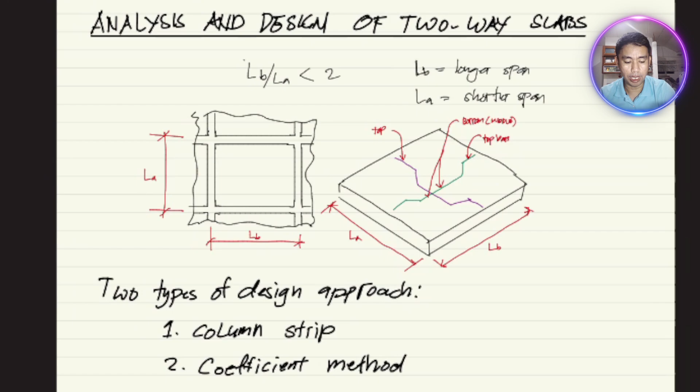First thing, when can we say a slab should be designed as one-way or two-way? We get the ratio of the length of the slab. We have the short span and the longer span, which is LA and LB. So we get the ratio of LB over LA. It should be less than 2. If that ratio is less than 2, the slab is almost square.

Sometimes you will doubt if it's doubly or singly reinforced. If the shape is too rectangular, most probably it's singly reinforced. So let's say the shape is like this, too rectangular. This is our LA, and this is our LB, the longer span. You will see the possible cracking direction is only here, because it's too long.

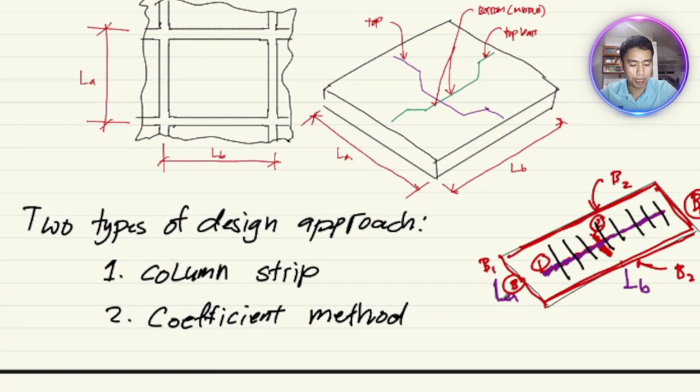Imagine, let's say, we exaggerate it so it really cracks, like that. So in one-way slab, the direction of our reinforcement is only in this direction, like it's stitched. Now, in two-way slab, it's in two directions.

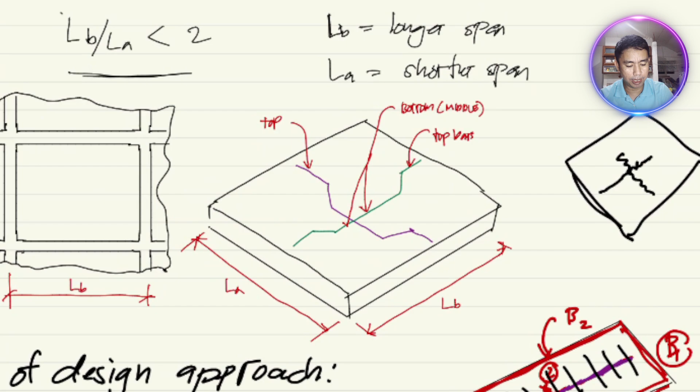This is an example or illustration of the possible reinforcement of a slab. If you see the green, that's the reinforcement along the long direction. Why does it look like a W or U shape? Because here there's a negative moment.

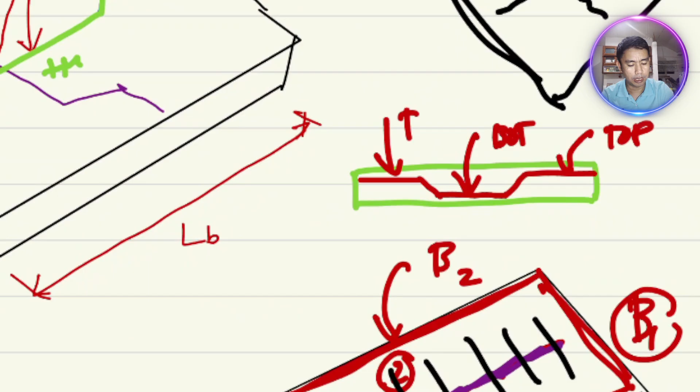Okay, let's proceed to design. There are two approaches in designing a two-way slab — actually there are many approaches, but aside from finite element analysis, these two are the common ones: first the column strip method, and second the coefficient method.

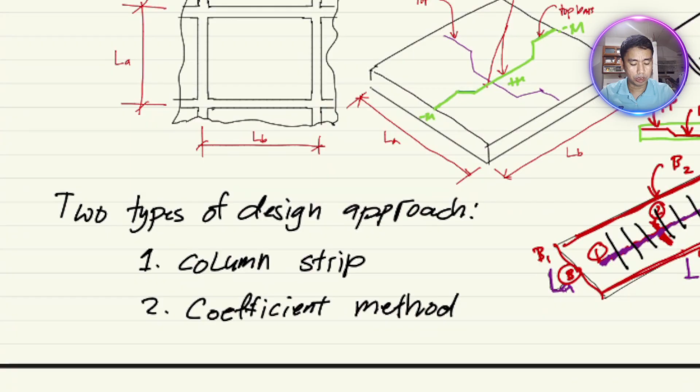What is column strip? Of course there's a column — the slab should have support, whether it has a beam or no beam. In column strip, these are our columns. Let's consider these first two columns. In column strip, we assume a strip — this one marked in red.

Ito yung strip na i-design natin siya na parang beam. As if yan lang yung strip na structural beam natin. Yung sa gitna na strip is parang kinakarga na lang niya. So bawat dalawang column, mayroon silang strip. The same rin dito, supposed to be the same rin sa direction na ito. Meron rin tayong strip, so another analysis naman yan sa direction na yun.

Ma-imagine ninyo, para siyang structure lang na beam column structure lang rin siya. Ang slab, ina-assume natin siya na beam, and then we will design it as a beam. Yung reinforcement, i-apply natin sa strip. Spacing pa rin yung ma-solve natin. Kung ano yung makuha natin na total area ng rebar, then we will use that as main reinforcement and then i-divide lang natin into spacing.

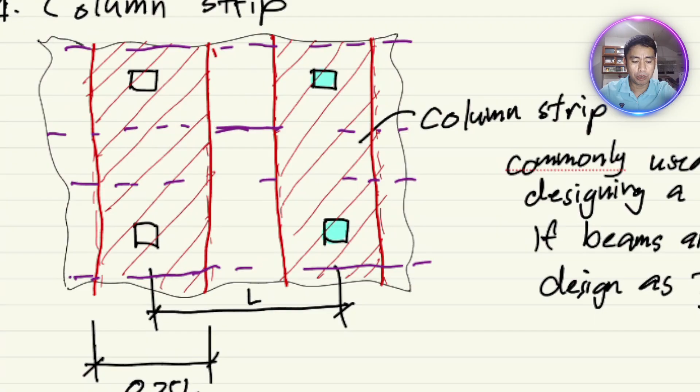Kundi ano lang, pure slab and then supported by column. If you look on the section view, parang ganito ito yung slab natin, then we have our columns. Share lang natin. Parang ganyan. Ito yung columns. This is the slab and then column. So diretso siya, nakapatong lang siya diretso sa column.

Minsan pinakapalan dito sa support para to support for shear. Ang iba precast, gina-deliver na lang sa site. Or ang ginagawa, pag multi-story, mag-cast ka lang sa baba ng whole slab, one whole na slab. And then pag tumigas na yung concrete, iaakyat lang siya. At pagkaakyat doon, nakatayo na yung column.

I don't know if you can imagine. Nakatayo na yung column, and then sa baba na gawin yung slab. May mga butas lang siya from column. And then pag matapos cure, iangat na lang yung slab. And then pagkaangat, if ito yung column, ito yung slab na angat, lagyan na ng lock sa baba. Yun ang one of the precast techniques.

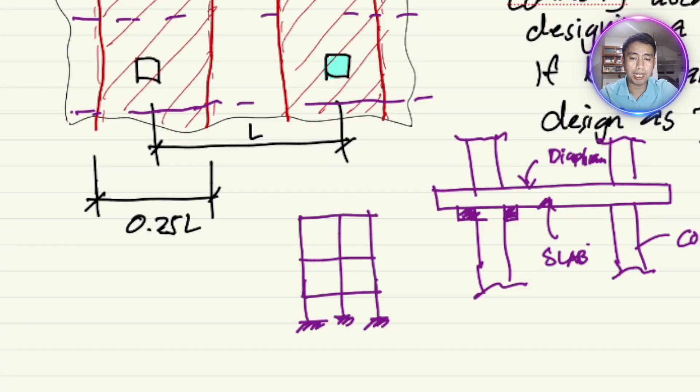Itong column strip generally ginagamit ito sa mga flat slab. Now kung mayroong presence ng beam, kasi tayo dito sa Philippines, prone tayo sa earthquake, most of the time we discourage the use of flat slabs here in our location. Pero kung gusto talaga nating gamitin, may mga structural analysis na mapapastrengthen natin yung concrete. Kung ang problema natin is stiffness, we can add a shear wall. We could add bracings, para ma-stiffen yung lateral stiffness natin. So yan yung column strip analysis.

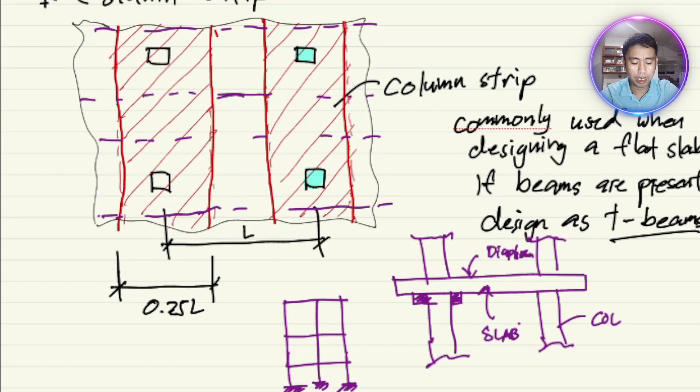Now, we will not include this in our examination kasi this approach sa pag-design ay mahaba masyado at very theoretical. Remember when we design a one-way slab, we use only coefficients, yung omega L squared over 9, over 12, over 14, over 16, ganun. Those are actually estimates para mas madali lang yung analysis natin. Tinry kong pag-aralan ito, pwede niyo namang matutunan, pero kung isasama natin sa exam, medyo lengthy na siya masyado. Minsan just to get the strip, ganun yung property ng strip, yung beam, mahaba na masyado.

Especially kung may beam, kasi T-beam, ang analysis natin T-beam na. Medyo mahaba na siya, and then ang daming mga formula, so I will just skip that one.

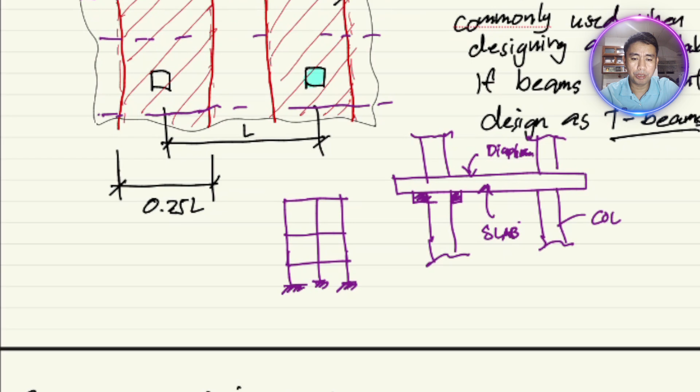I'll just lecture to you, explain to you yung idea ng flat slab at saka column strip, and then kung saan ito ginagamit.

So we'll jump to the second approach, which is the ACI approach. Medyo boring lang siya kasi paulit-ulit, pero this one is the ACI. The con for this one is wala ito sa NSCP. But sa designing, mostly ito yung ginagamit namin. Most of the structural engineers, ito yung ginagamit na approach. So wala lang ito sa NSCP.

Ito nasa book ni Nilson sa Design of Concrete Structures. Pero ito lang yung i-consider natin, i-kasama natin sa exam.

So ano yung itong na concept? This is two-way, still two-way. Dalawang moment diagram ang i-consider natin. So consider tayo ng strip pa rin.

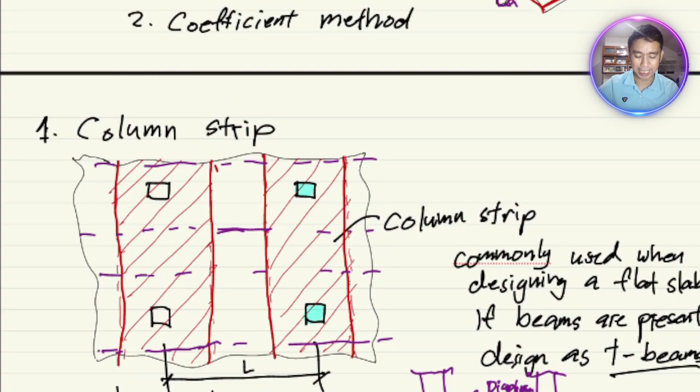Yung kanina is column strip, and iniwasan natin kasi mahirap. Ito, napakasimple lang na strip. Mag-assume lang tayo ng one strip. The same yung approach natin sa one-way design. Assume tayo ng one strip and then apply it all sa succeeding or adjacent strips.

So dito, ganun rin, pero yung strip natin is dalawa. One in the short direction and one is in the long direction. And then each of the strip, mayroon siyang moment diagram.

So we have moment diagram. Most of our moment diagram is, let's say, omega L squared over something, right? Let's say over 9. This 1 over 9 — what is this? I said 1 over 9, but I'm writing 1 over 2.

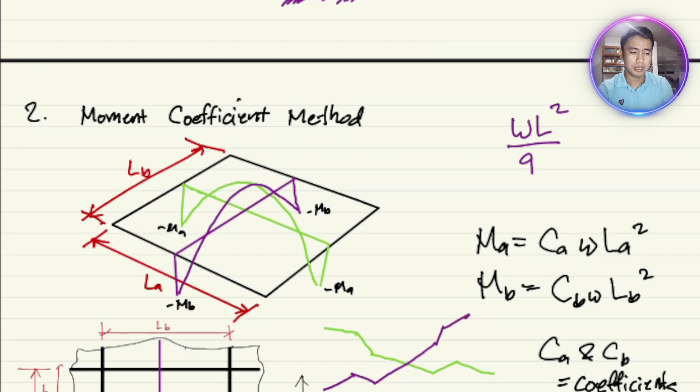Sa board exam, magiging sigurista kayo. Even 1 plus 1, you have to calculate, kasi minsan may iba yung nasa isip mo, iba naman yung sulat mo. Pero you cannot make it as justification sa exam ninyo.

So itong 1 over 9, this is actually an estimate. Hindi talaga yung true na structural analysis where we get the real value of moment. So itong 1 over 9, meron na tayong estimation.

Ganun din ang gagamitin natin dito sa moment coefficient method. Meron tayong pinaka-basic na equation, omega L squared, and then meron tayong CA, where ang CA, these are coefficients. May table na for this one, and we'll just use the table.

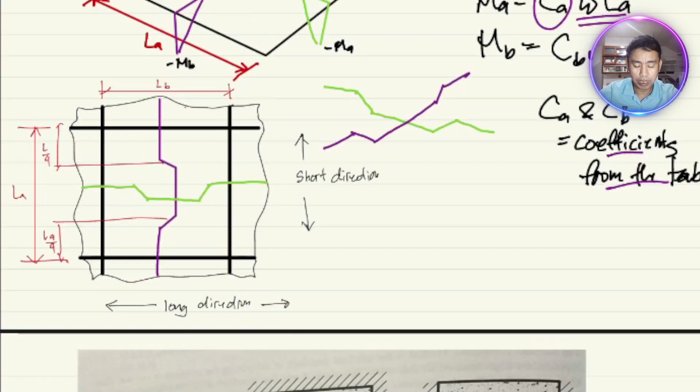And I will teach you here how to use the table. So if you can see here, itong dark black, these are beams. By the way, this approach, ginagamit lang ito sa...

edge-supported slab. Anong ibig sabihin? Edge-supported slab, meaning yung end ng slab mayroong beam. Hindi siya pwede sa open. Dapat mayroon siyang support sa edge. It could be discontinuous, pwede siyang maputol doon yung support, pero mayroon talagang beam. Ganun siya, so ito na ang concept.

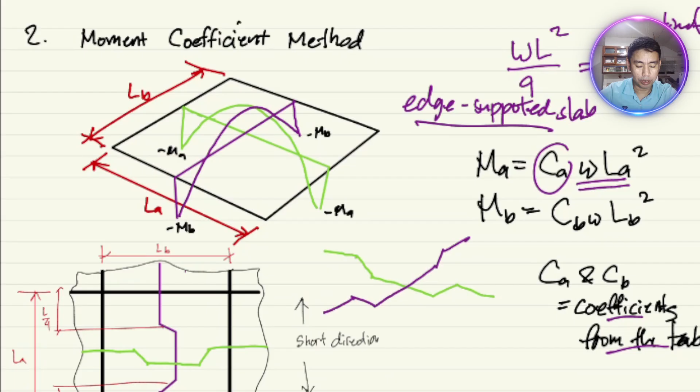Kaya nga widely used ito sa Philippines kasi it's easy na calculation, and then most of our structures here ay mayroong beams talaga. Ang slab is supported by beams. So ganun yung tinatawag na load path.

Load path meaning, meron tayong dead load, live load na naka-apply sa slab. And then from the slab, pupunta yung load dun sa beam. And then from beam, pupunta yung load sa column. Ang column, pupunta yung load dun sa foundation. So ganun yung tinatawag na load path.

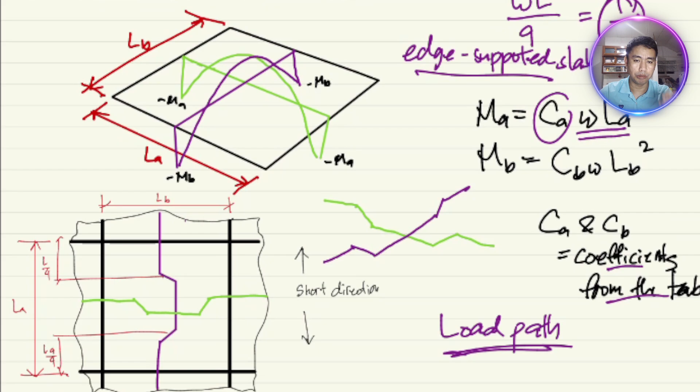So ang reinforcement natin sa two-way span, dalawa. Imagine this dark black, yan yung mga beams natin. At itong mga nasa gilid, that means continuous siya doon, naka-continuous siya, pinutol lang natin sa illustration.

Kung titignan niyo, ang green na reinforcement, yan, sa gitna, that is long direction. We call it long direction, yun yung LB, parallel siya sa length LB. Ang parallel sa LA, we call it short direction. So ang reinforcement ng long direction natin, ito yung nasa green.

Itong naka-purple or violet, yan yung reinforcement along the short direction. So makikita niyo, dalawa, naka-bend lang siya. Bakit parang ganun? Kasi naka-bend siya, kasi along the support, ang reinforcement nasa taas.

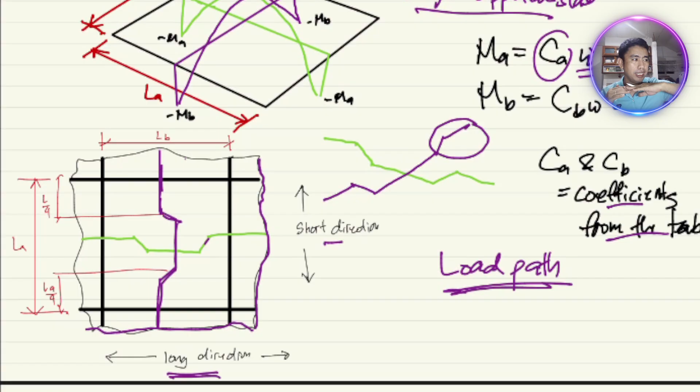So kung mag-reinforce kayo ng slab, hindi pwede yung parang matting lang, nakamating lang siya the same elevation yung reinforcement. Hindi yan pwede na ganyan.

Dapat naka-bend siya, so meaning dapat sa support side, sa support ng slab, yung malapit sa beam, dapat nasa taas yung reinforcement. Sa gitna naman ng slab, dapat nasa baba yung reinforcement. Yung mga panday, pag diretso na, mostly sa mga kita mo sa mga panday na walang experience sa under sa engineering, diretso na lang yan, latag lang diretso reinforcement.

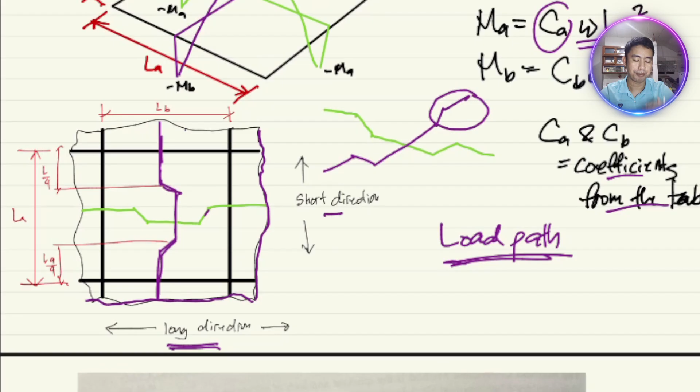You really need wisdom or knowledge from the engineer because there are bendings involved, so we know where our reinforcement is effective.

So, our CA and CB values we get from the table. This is one example of the table. We have a table for total uniform factored load, dead load plus live load, and also separate ones for dead load only and live load only. Then there's the load distribution, how much percentage goes to the short direction beams - I'm speaking about the load path, how much of it will go to the short direction. So this is just one table.

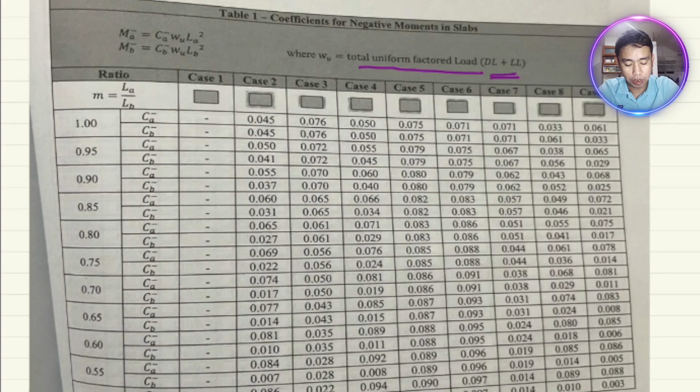In the examination, I will give four tables, and then we'll just look at the table. So in the table, how to use it, we will first determine the value of M.

M is LA over LB. So whatever the ratio is, we use that value of M. Let's say the ratio is 0.95, something like that. Then we'll look at the case.

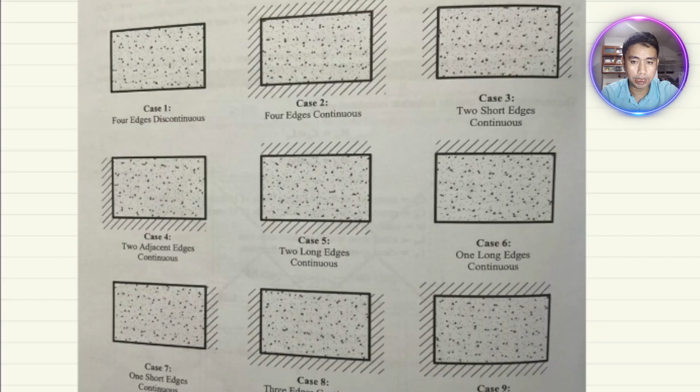What are the cases? We have actually 9 cases. Case 1: looking at case 1, all 4 edges are discontinuous. It doesn't mean there's no beam, because the concept is it should have a beam - it just happened that there's no continuity around it, meaning the slab is cut off there. So if all 4 edges are discontinuous, we call that case 1.

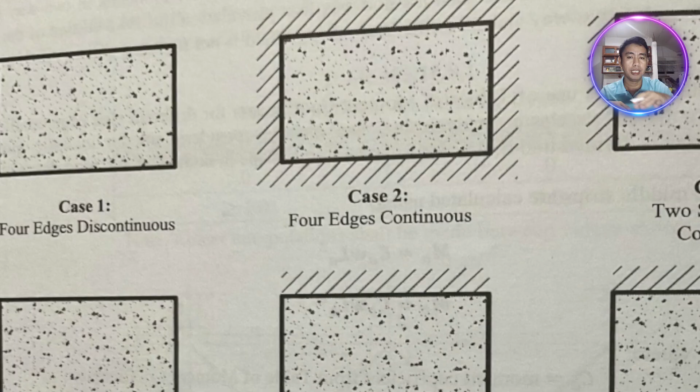Case 2: all slab edges are continuous. These are the interior slabs - we call them interior slabs because they're inside the structure of the building, so other slabs surround it. That's for edge continuous.

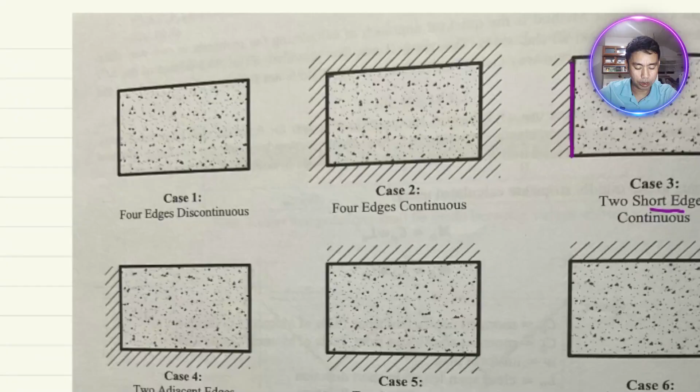So let's say we are on case 3. We have a value here - let's say CA negative. That is short direction and negative moment. This is the factor here, for case 3, the factor is...

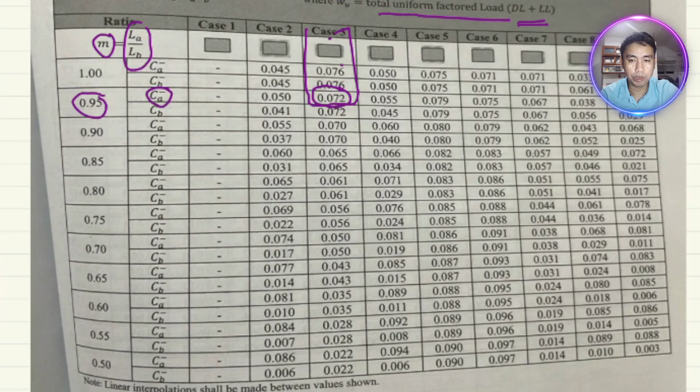0.072. So what does that mean? If it's 0.072, it's like this: this is CA omega L squared. That's CA, becoming 0.072 omega L squared - that's the value of the moment, negative along the short direction.

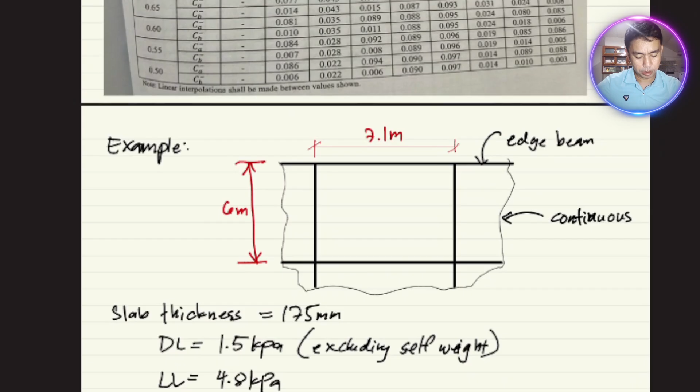So it's better to solve an example so you can see how to use this table. Oh, I didn't attach the table, the full table. Anyway, just trust me, those are the right values.

But that's it - what I explained is how to use the table. We need the ratio M, we need the case, and then we just get the CA, CB. This table is for negative moments - it says at the top, negative moments in slab. There are also positive moments - the positive moments have live load values, different from dead load.

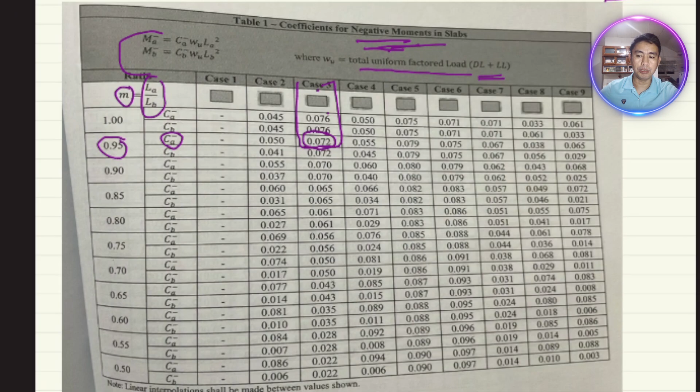Okay, so here's an example. We have 7.1 by 6 meters. This is the edge beam at the top, continuous on both sides, and the bottom one is also continuous. The slab thickness is given, the same way as before.

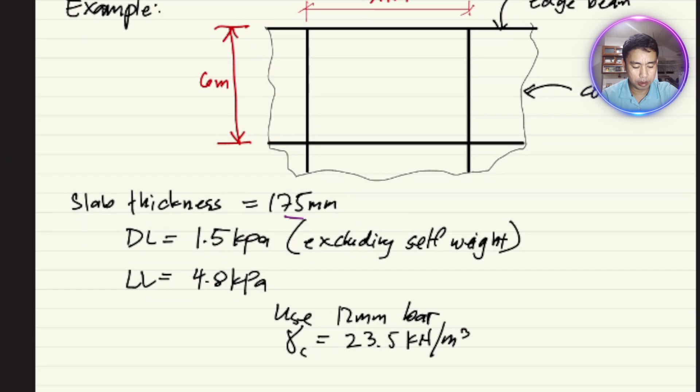But this time, the slab is given as 175 mm. I forgot, kindly verify the thickness of the slab - there's a perimeter formula. I didn't see it in the book, but I remember from Nilson it's something like perimeter over 180, for solving the thickness of slab for two-way design. Just verify this, I'm not sure if it's 180.

Okay, so here, given the 175 mm, dead load is 1.5 kPa, excluding - what is that - so the dead load here, when you say dead load, these are permanent loads, right? So it says excluding weight, meaning the self-weight is not yet included. So that means we still need to solve for the self-weight. Live load is 4.8 kPa.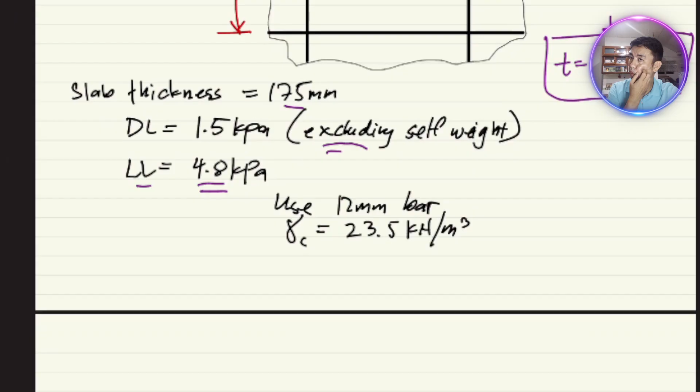Just for you to imagine, this 4.8 kPa is quite heavy - this is the live load for corridors, busy area slabs. So we'll use 4.8 kPa. We'll use 12mm bar and assume unit weight of concrete is 23.5. Okay, so, solution.

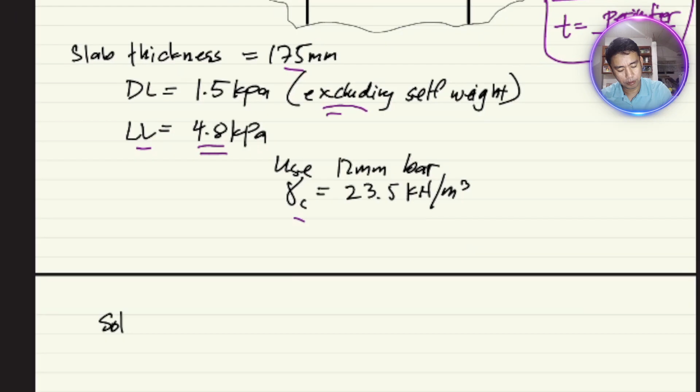So first, consider a 1 meter strip. Okay, so that means our omega dead load, considering 1 meter strip, is...

We have self-weight. Self-weight. Our first self-weight is 23.5, the unit weight, times what? Times the thickness, 0.175, times 1 meter. Okay, that's the area of the section.

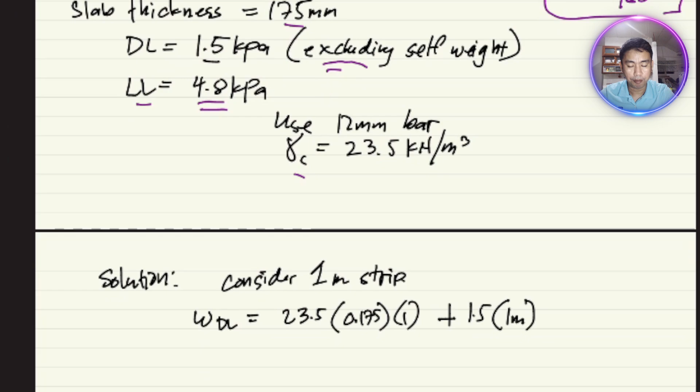And then we have a dead load of 1.5 kPa. So this is 1.5. To make it kilonewton per meter, we multiply it by 1 meter. So our total omega dead load is 5.63 kPa.

Our omega live load is given, nothing else, 4.8 kPa. Okay, let's solve omega u.

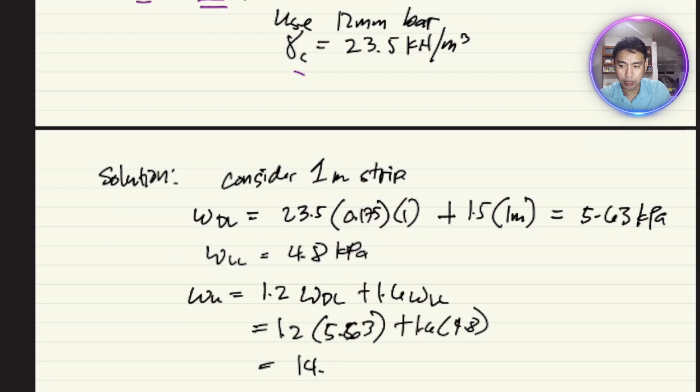Omega u is 1.2 times omega dead load plus 1.6 omega live load. We have 1.2 of 5.63 plus 1.6 of 4.8. So this is 14.416. Okay, that's our omega u.

Now, as I've said, we need to solve M. M is, what is M? LA over LB, meaning short direction over long direction. What is our short direction?

A moment, okay. It should be... sorry, I made a mistake here. It should be 5.75 over 7.1.

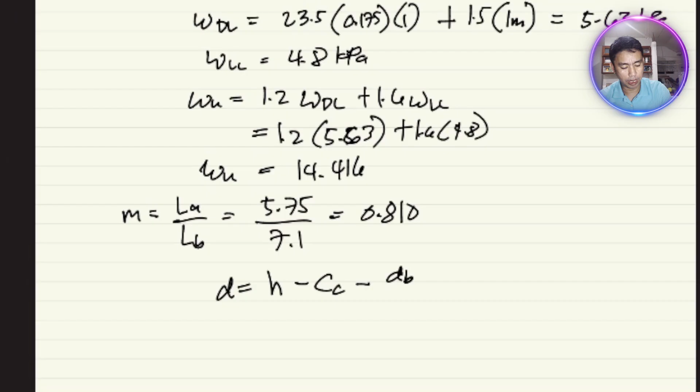So we have 0.81. Okay, and then our D, D is H minus concrete cover, minus diameter of bar over 2. So we have 175 minus 20, our concrete cover is mostly 20, minus 12 over 2. This is 149 mm.

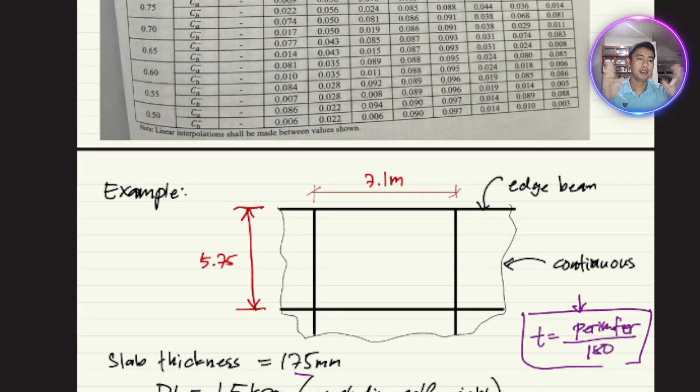Okay, so what is our case? This is the design concept. What do you think? For the long and short direction, there's a short end with continuity at the bottom, but none at the top. So if we look at the cases, it seems like case number 8, right? Something like that — continuity on the short side, and on the long side, none. Okay, so using table 1, case 8.

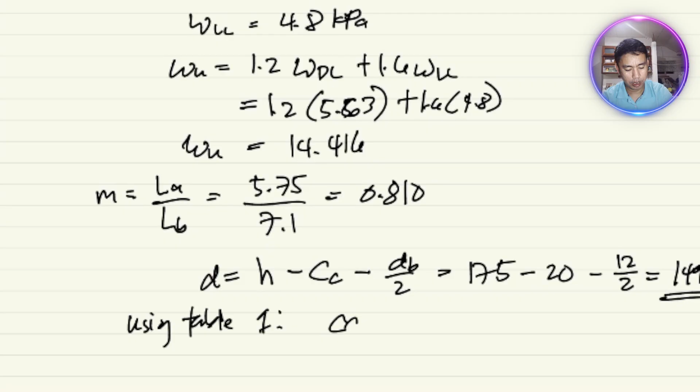Let's start with CA negative. Now look at the ratio. Our ratio is 0.810. The problem is, that's not in the table.

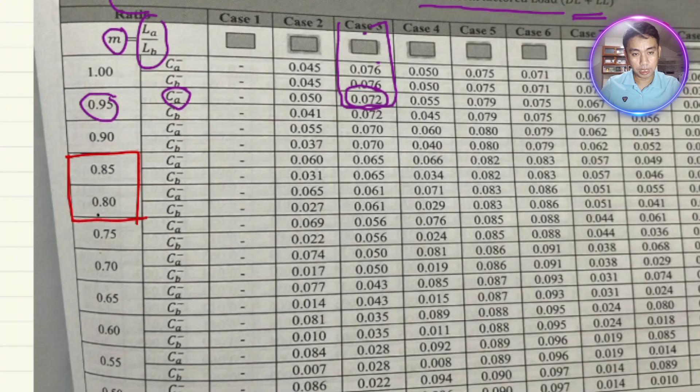But we have 0.8, so somewhere in between there's 0.85. And then case 8 — this is our case. So somewhere in between these values, let me mark it in red. Right? That's case 8 and the ratio — there are two: CA negative at the top, then CB negative at the bottom.

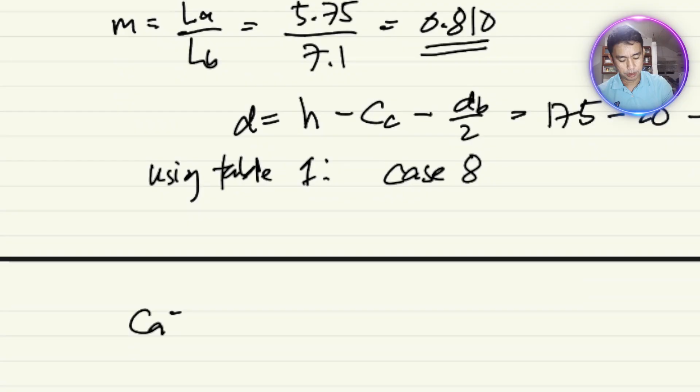Okay, so now, since we don't have 0.810, let's do ratio and proportion. The only given in the table is 0.8, so we can go with 0.8. What is the value for that?

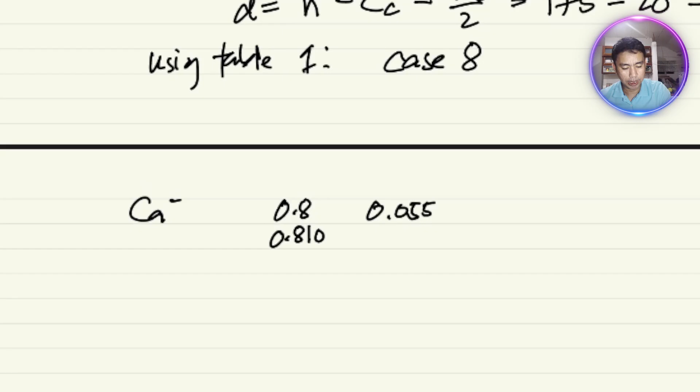Now for 0.810, this is what we're solving for. So this is the value of CA negative. The good thing is we have a 0.85 ratio, and its value is 0.049. So let's do ratio and proportion.

This is easy. We can do it like this: this one minus this one. The ratio of 0.055 minus CA, like that. Equal to this one over this one, this one over this one.

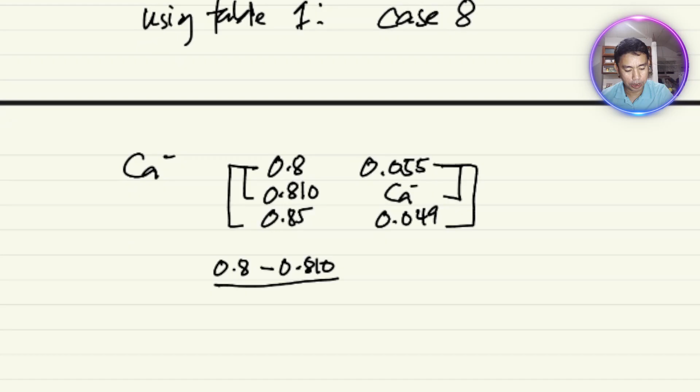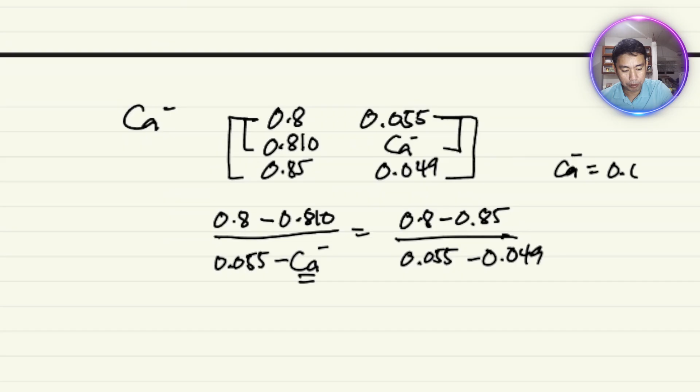So what I'm saying is 0.8 minus 0.810, equal to, on the right side, 0.055 minus CA negative, equal to, going back to the left, 0.8 minus 0.85 over 0.055 minus 0.049. So we can solve for CA here. Our CA value, let's say CA negative, is equal to 0.0538.

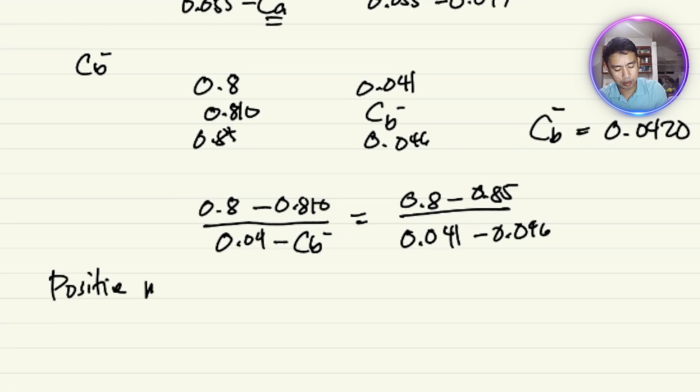Okay, so for positive moment — when you say positive moment, that's at the middle. Now, there are two positive moments: it could be dead load in table 2, and then live load in table 3. So this calculation is a bit long, but anyway, you already know how to calculate it.

The value, I won't calculate it again — CA positive dead load is 0.0314.

For positive moment live load — it becomes CB, sorry, moment live load for now, it's still CA. CA positive live load, using the same approach as before, will be equal to 0.0154.

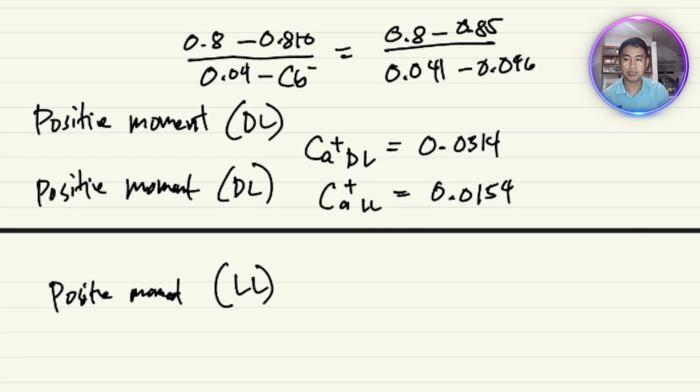And then we have positive moment — sorry, I made another mistake, class. This should be dead load, since this is the second one for live load. Okay, so our value, we have CA positive live load — sorry, that's actually dead load.

Okay, so again, same ratio and proportion, look it up in the table. I'll jump directly to the value: CA positive live load, we have 0.0432.

And then still for live load, CB positive live load, this is equal to 0.0196.

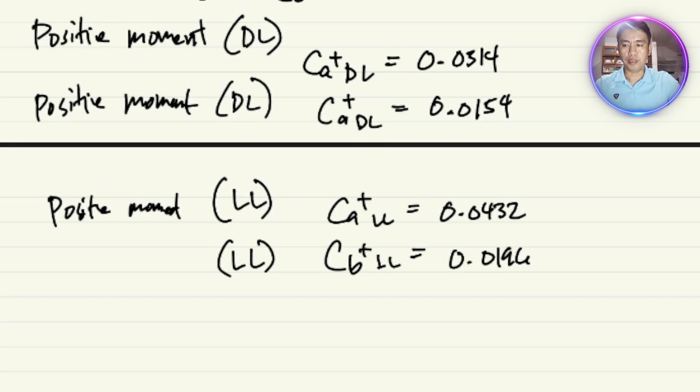Okay, so solve natin yung moments. Yung moments yun yung... sorry. Ito na yung C omega L squared. Wala na palang something, okay? Ito na yung moments. So let's start with negative moments.

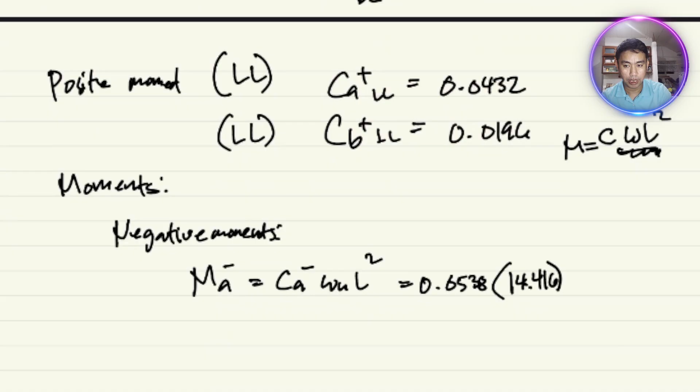MA negative, meaning yan yung moment along the short direction and negative. MA negative is equal to CA negative omega U L squared. Ano yung CA negative natin? Ito, 0.0538. So I can write here 0.0538 times omega U natin is 14.416 times L. Ano yung LA? Ang LA, ito yung L ng short direction, 5.75, because A ang pinag-usapan natin dito. So times 5.75 squared. This will be equal to 25.643 kilonewton meter.

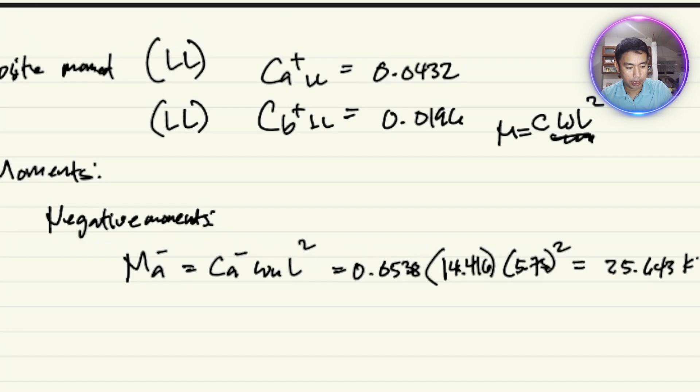Okay, then for MB, equals to CB negative omega U LB squared, LA squared pala ito sa taas. So we have 0.0420 times 14.416 times 7.1 squared. Okay, take note of the length ha, kasi kung B yung length na mahaba, A is yung short. So this is 30.522 kilonewton meter. How about positive moment ng slab?

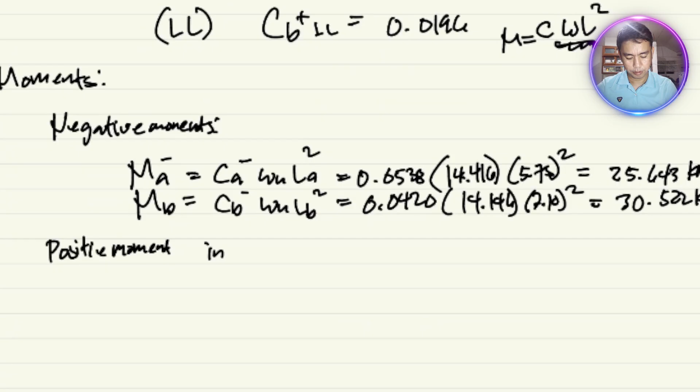So we have MA dead load, MA positive dead load. This is equal to CA positive omega U dead load, LA squared. Now, yung omega U lang na dead load... ay, dapat na ano ito. Dead load is 1.2 times 5.63. Let me check, tama ba itong notes ko? 1.2 times 5.63. Yeah, 6.736.

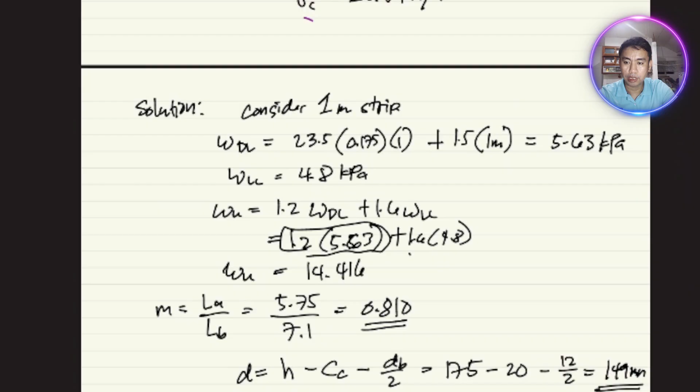Ito sa dead load lang ha. Dead load is equal to 0.0314, ito yung CA value. Tingnan niya sa na-solve natin. And then times the length 6.7. Omega U, omega U dead load lang pala. Ito yung 1.2 times dead load, okay. 6.736 times 5.75 squared. So ang MA dead load natin is 25.643 kilonewton meter.

And then, MB, sorry, MA live load. Nawala na class. MA live load, it will be CA positive live load, omega U live load times L. We are still in A, LA squared. So CA positive 0.0432 times 7.68 times 5.75 squared. This will equal to 10.969 kilonewton meter.

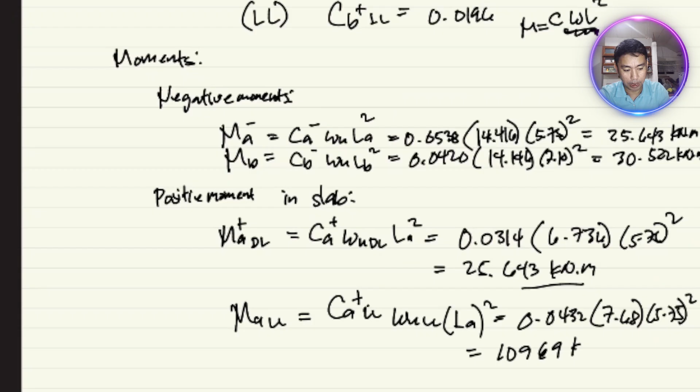So ang MA dead load plus live load, isum up lang natin itong dalawa. Okay, so this is... wait, parang may mali. MA dead load, I'm looking at, mali itong 25. May mali pala. 6,993 kilonewton meter, that's 10.9, 10.9. 6.9. So this is 6.993 kilonewton meter plus 10.969. This will be equal to 17.962. Along A pa lang yan.

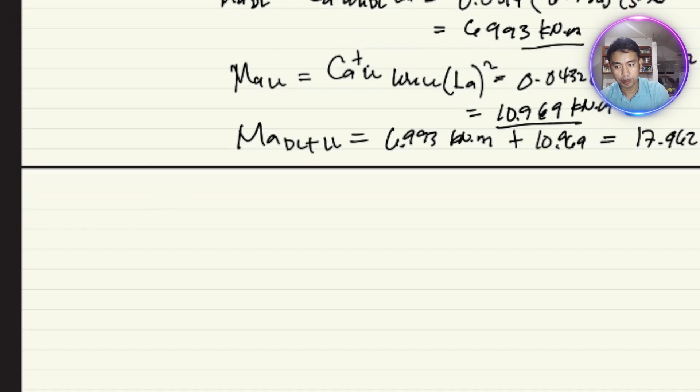Okay, so the same along B. Um, we have to write kasi ang dami ng value, malito na tayo. Positive moments in slab, MB positive. Okay, so we have MB positive dead load, CB dead load, omega U dead load times LB squared. Now take note, ibang table ang ginamit rin dito. Hindi na yung table 1. So we have 0.0154 times 6.736 times 7.10 squared. This will be equal to 5.229 kilonewton meter.

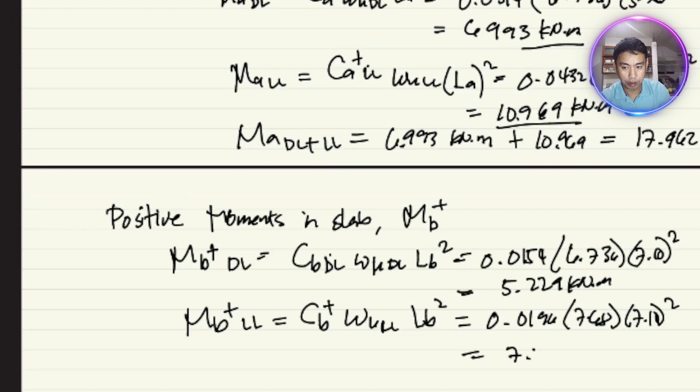Okay, and then MB positive live load will be CB positive omega U live load LB squared. LB pa rin. So 0.0196 times 7.68 times 7.10 squared. This is equal to 7.588 kilonewton meter. Okay, so meron na tayong load na moment.

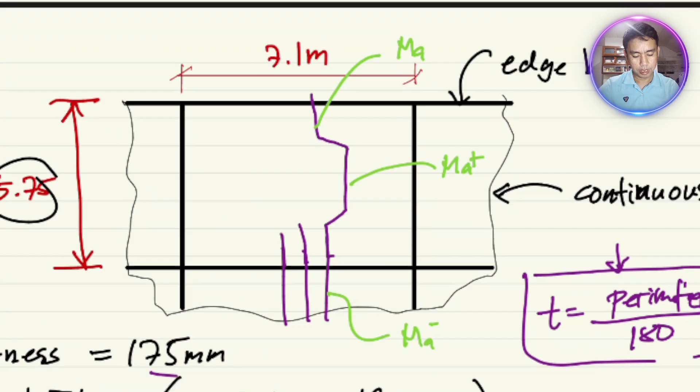So now look at this one. Ito yung reinforcement natin. Meron tayong reinforcement somewhere here, di ba? Yan, ayan, mga reinforcement na ganyan. Yan, ito dito, actually, this one is for MA negative. Ito na reinforcement nakuha natin dito, MA positive. Ito, meron tayong MA negative. Okay, but take note, this one sa taas is nasa edge tayo ng beam.

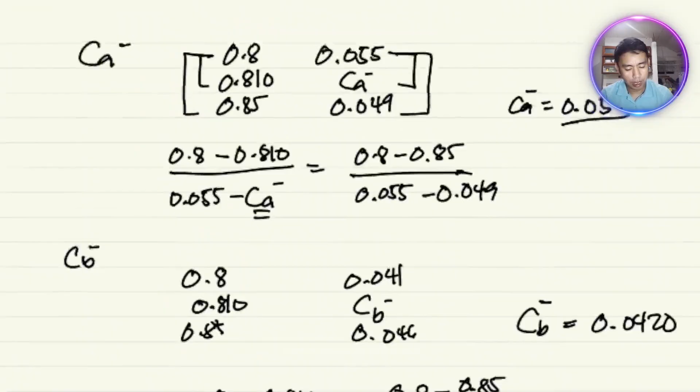Okay, now according sa rule, according sa NSCP, ang edge, sa A direction naman tayo, no? Diba? So, MA at discontinuous is equal to 1/3 of MA positive. Okay, 1/3 lang siya. Bakit ganon? Meaning, kung ito yung reinforcement natin sa baba, MA positive, 1/3 lang doon sa MA. So what does it mean? Meaning every reinforcement, every 3 of the reinforcement, i-continue natin doon sa discontinuous. Every 3. One reinforcement every 3 ang i-diretso.

So parang ganito. Mayroon tayo dito, naka-bend ganyan, and then 1, 2, 3. And then ang next naman, parang ganyan na siya. Yan. Next naman, bend, then bend naman pa, sa gets niyo? So ito na distance, 3 times this distance. So pag ang arrangement natin, mag-bend tayo every 3, kasi nga, ang moment niya is just 1/3. But still, hindi ka padalos-dalos na yan na diretso, kasi we still have to check yung sa SMAX. Mag-govern pa rin yung SMAX. Okay, not necessary na one-third lang siya.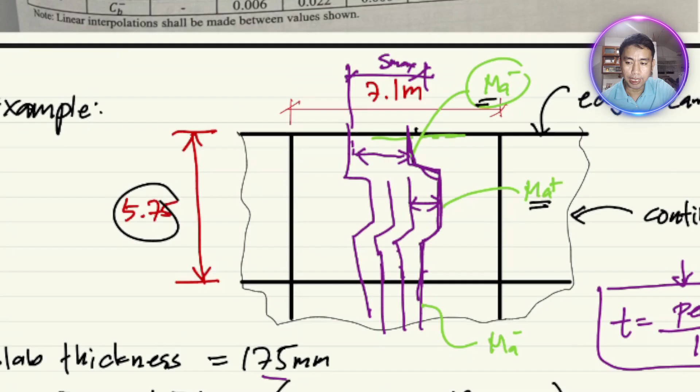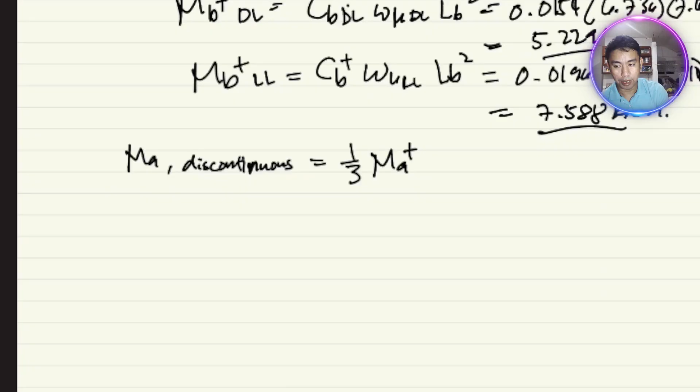So let's compute the spacing. Meron na tayong moment, it's just a matter of calculation. Okay, so yung mga criteria sa rubrics natin sa decision making kung sa design natin, i-lay down muna natin. So spacing of reinforcement. Ano ngayon? Row minimum. Ano yung row minimum? 0.25, para hindi tayo mag-ulit-ulit dito kasi general na ito na gamit natin over Fy. This is 0.25 square root of 21 over 414, 0.00277. Meron pa isa. Row minimum is equal to 1.4 over Fy. This is 1.4 over 414. So this is 0.00338. Compare mo sa taas. So this one governs.

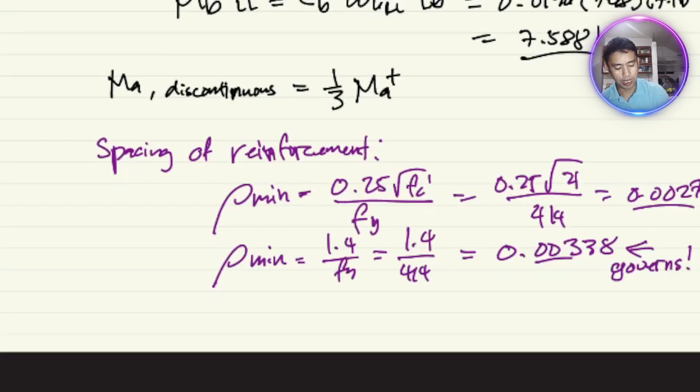Okay. So rho minimum is 0.00338, and then AS minimum. AS min is 0.0020 times area gross, so this is 0.002. It's parang the same as one-way slab. Times 1,000 times 175 for the area, width of beam times thickness of 175 mm, area gross hindi yung D. So this is 350 mm squared.

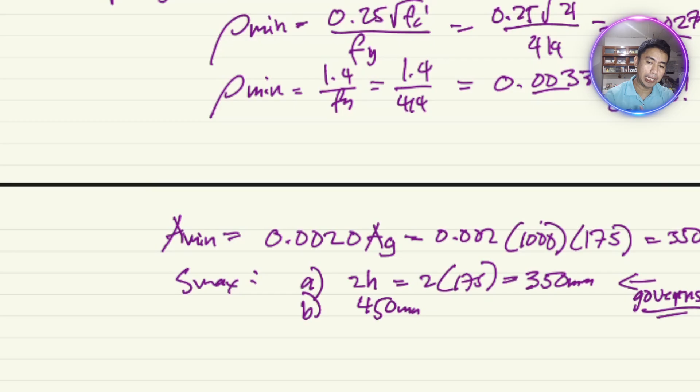S-max. Let's finish the criteria. There are two criteria for S-max, meaning maximum spacing of reinforcement. It could be 2H, twice the thickness, so this is 2 times 175 equals 350 mm, or 450 mm. That means this one governs, meaning if the calculation gives a spacing greater than 350, we need to adopt 350 mm.

Rho max. Let's check rho max. So the analysis here is parang like a beam. 0.85 Fc prime beta 1 over Fy. So this is 3 over 7 times 0.85 times 21 times 0.8, I'm sorry, 414. So this is equal to 0.0158.

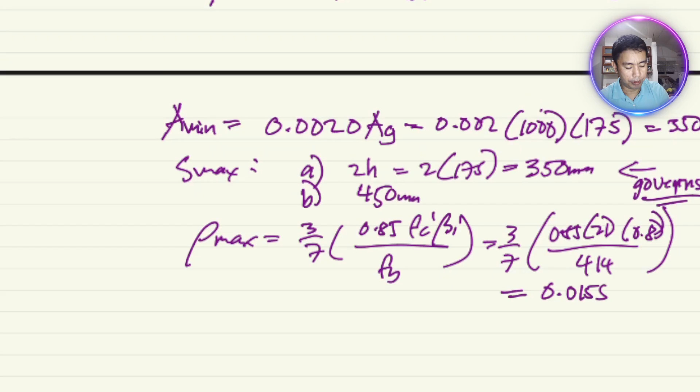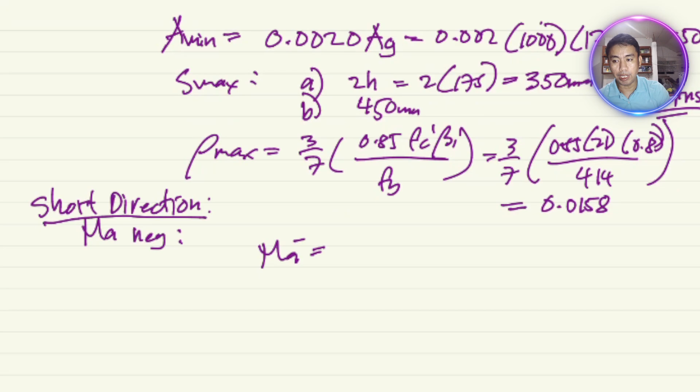Okay, so we'll start designing. Let's say for MA negative. Let's start sa MA, this is for the short direction. What is our MA negative? We have it already, MA negative is 25.643 kilonewton meter. Okay, so we have a direct formula to get rho.

Actually, we can get Rn and then from Rn, solve for rho. But there's a formula that directly gives rho. Mu equals phi rho Fy bd squared times 1 minus 0.59 rho Fy over Fc prime. So let's solve this using this formula. We could also use Rn and then rho, but here we'll go direct.

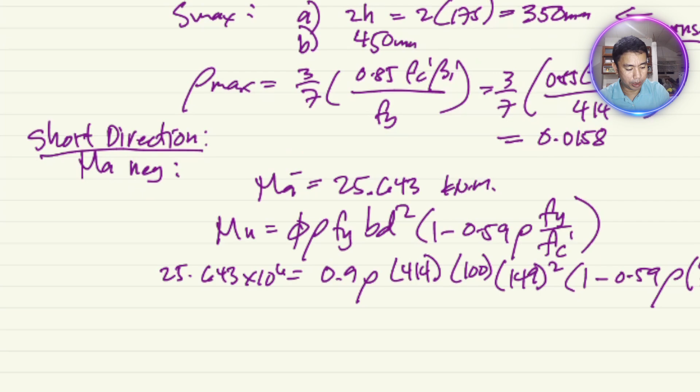25.643 times 10 to the 6 equals phi. We'll assume that most of the time it yields, so the value here is 0.9, times rho Fy, Fy is 414, times 1,000, D. The D is 149 squared, times 1 minus 0.59 times rho times 414 over 21.

Okay, so now our rho is equal to 0.00322. Let's compare to rho minimum, 0.00338. This is only 322, so this is less than rho minimum, therefore use rho minimum. And the resulting rho is also less than rho max, so that's okay. If it's less than rho max, that means our analysis as singly reinforced is okay, because if greater than rho max, we'd need to analyze it as doubly reinforced.

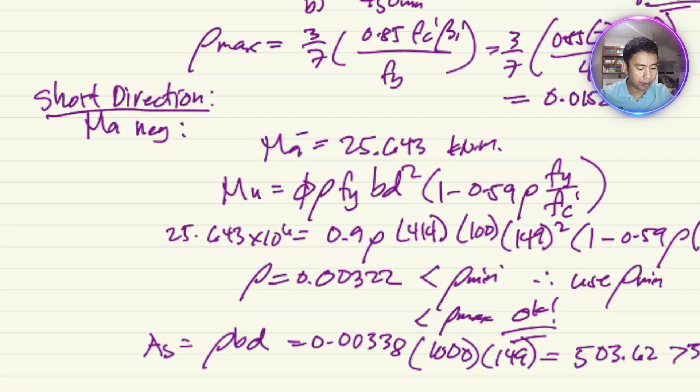Okay, so we already have rho, we can solve AS now. AS is equal to rho bd. This is 0.00338 times 1,000 times 149, this is 503.62. So it's greater than area minimum of 350, so this is okay, since it's greater than the 350 minimum reinforcement.

So now we have AS, then we can solve the spacing. Spacing is area of bar over area of steel, 1,000 times 1,000, sorry. So area of bar is pi over 4 times 12 squared, that's the 12 mm diameter, over 503.62, times 1,000. So we have 224.569.

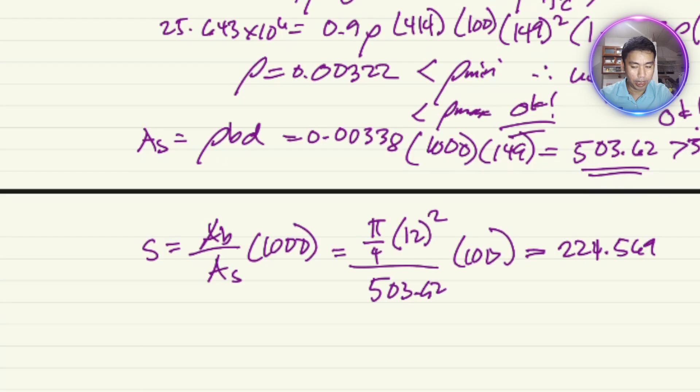224.6, so less than 350 mm, which is our maximum spacing, so that's okay. 350 mm, so it's not nice that the reinforcement is 224.569, so we can just say 200 mm. Okay, so that's the short direction already, this is our reinforced slab, short direction along LA.

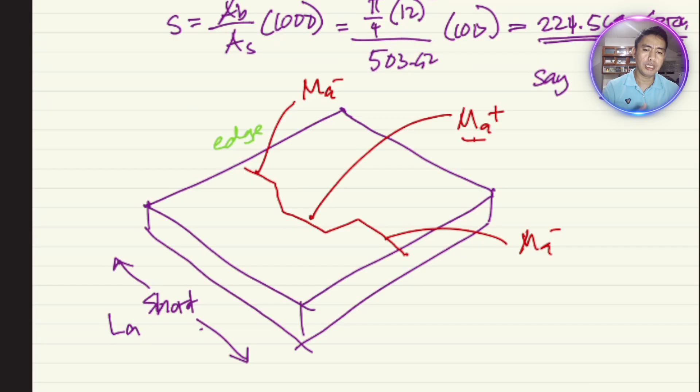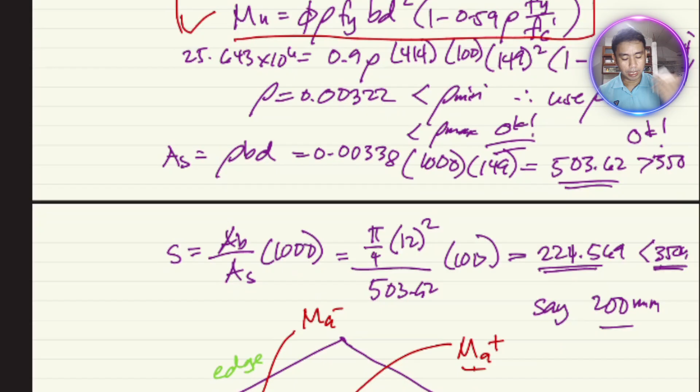Okay, so that's the idea. We've already reached 1 hour. I bet you can continue this one. So that's just the concept. We have the moment, then just use the concept of design. Use this direct equation to solve for rho. Again, you could also use Rn and then rho, but it's longer, so just memorize this equation, get the rho, check against area minimum, rho minimum, solve the area, check against area minimum, and then spacing, check against maximum spacing.

Whatever your result, you always check with the maximum and minimum. So that's the spacing, our spacing is every 200, meaning here it's every 200. Alright, you can continue from here. So my next video will be about columns. Thank you.